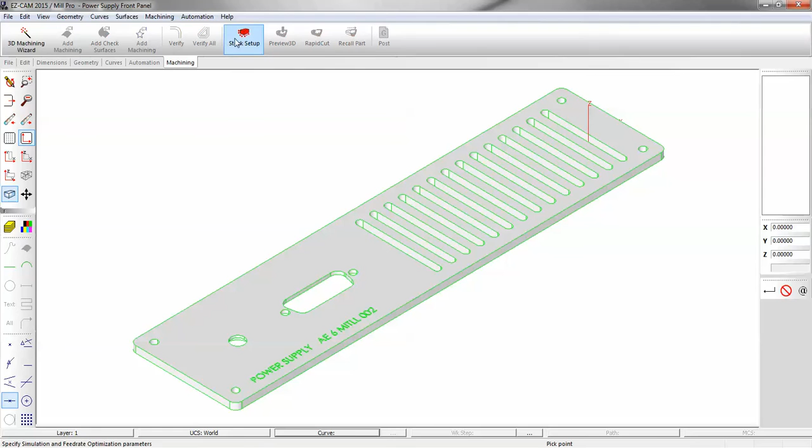Okay, we're going to machine these slots. I'll do the pocket from the back side along with this counter bore. And we'll do the engraving on the top, cut around the outside edge.

I've added Face Curve to my Curves tab. You can do that by going to View, Customize. You can add any buttons that are found in the menus, and you can also add shortcut keys. For example, I want to measure the slot, so I hit my shortcut key and measure the radius.

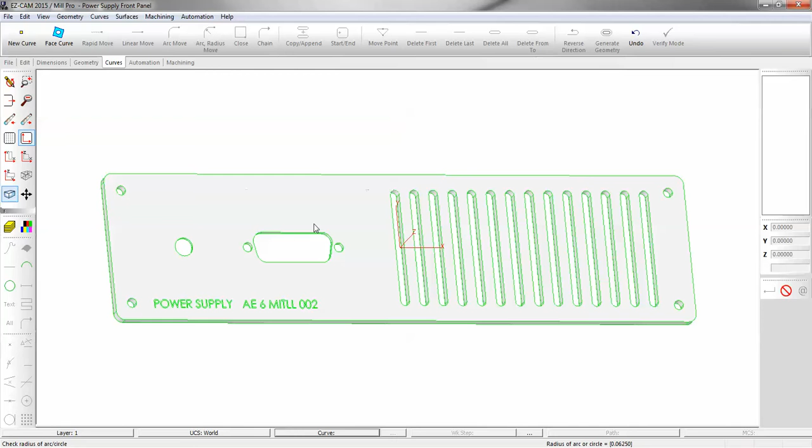I can use a 1/8 tool to go straight through. Now I could use a pocket with a smaller tool, and I'm going to show you contouring and pocketing. So we'll go with a face curve.

I'm going to pick the bottom face. Gave me all the curves I need for the slots. Gave me the curve for the outside profile. We'll use hole recognition to machine these holes.

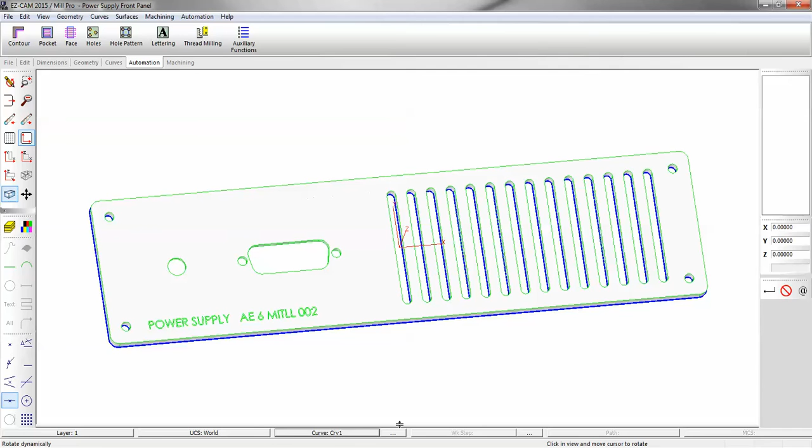So I'll start off with, this is my active curve, and then we'll add the other curves in there as well. Because that was my active curve, it'll know to include that. If you're using cutter comp, we're using a 1/8 tool. Left for climb mill, right for conventional.

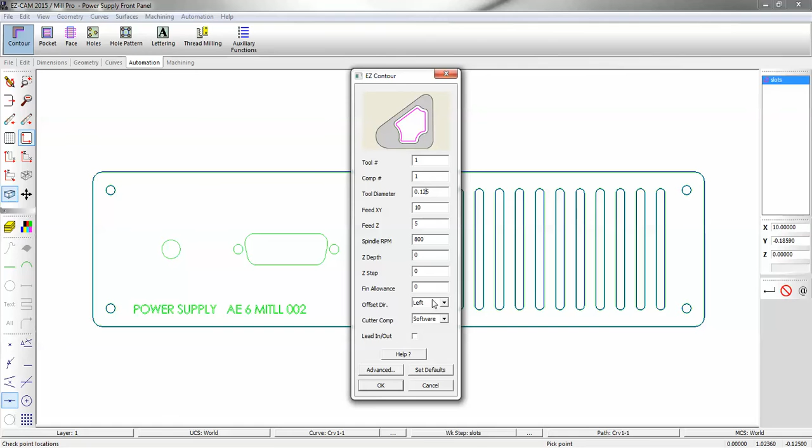I'm going to go to advanced. Now the curve is at the bottom of the part, so I could leave the depth at 0, or you can hit the auto button. And we want to go a little deeper.

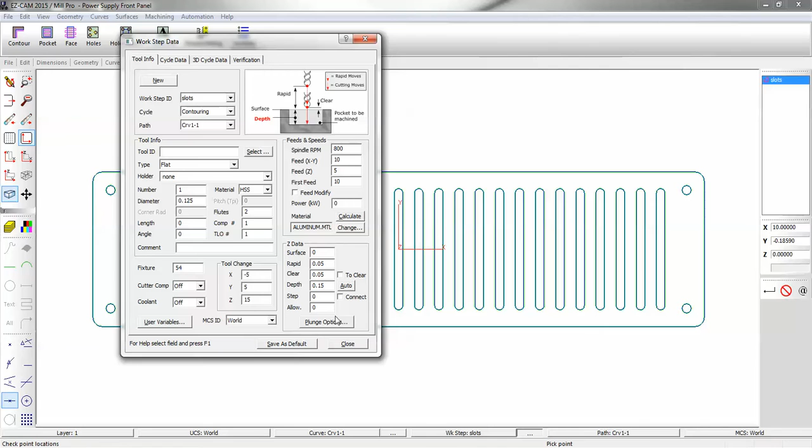Then for plunging, rather than plunge straight down like a drill, you could pre-drill and you could have the tool plunge in a pre-drilled location. I'm just going to use a ramp, and I'll use a straight ramp at 1/4 of an inch length distance.

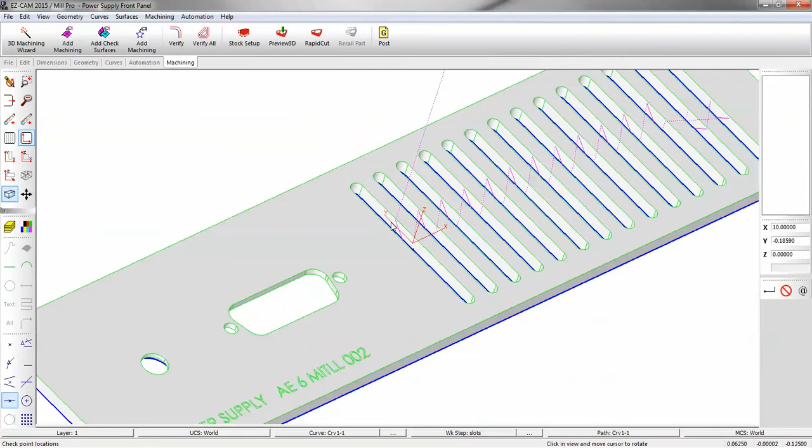And I'm going to add my machining curves. Verify. As you can see, you're getting your ramp to depth. Now if I don't want to go full depth, I can just add a step. Then you get multiple passes until you get to the depth.

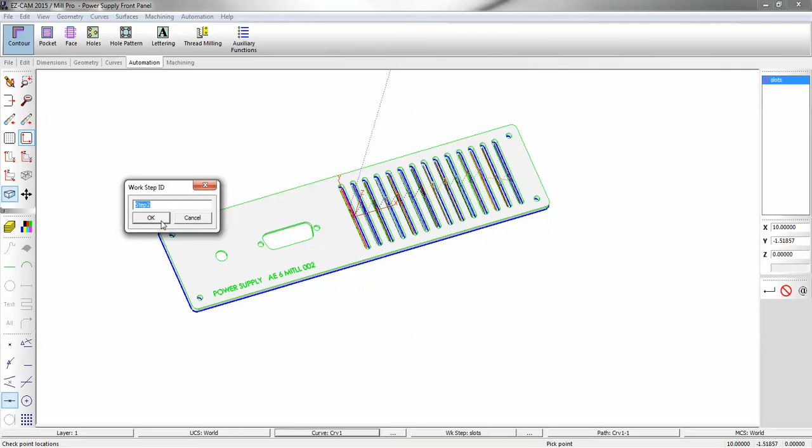Next I'll machine the outside profile. We'll use a 1/2 inch tool. I'm not worried about the feeds and speeds. You can calculate those. Let's go to advanced. Change that to a carbide tool and hit calculate. And of course we can restrict it to your maximum RPM and scale the feed rates back accordingly.

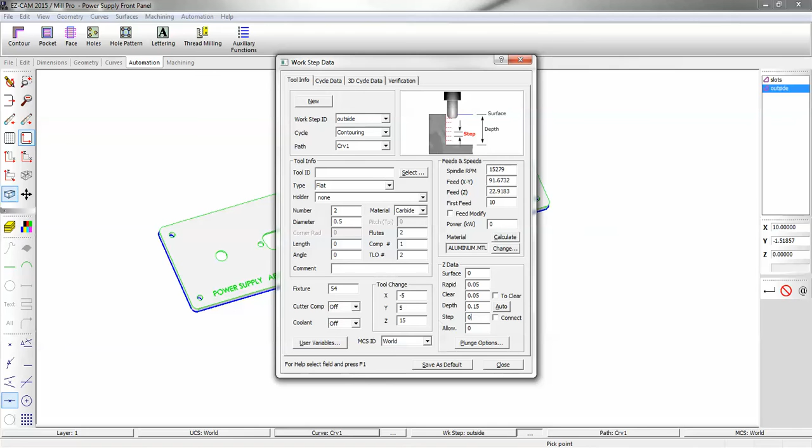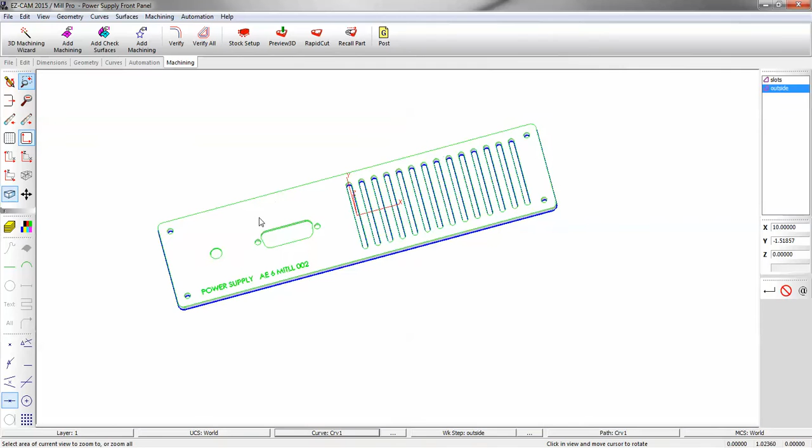That's what we have so far. You can slow the simulation down with the numbers on your keypad. 0 will pause it, and you hit enter and it will step through the process. Now I'll go with hole recognition.

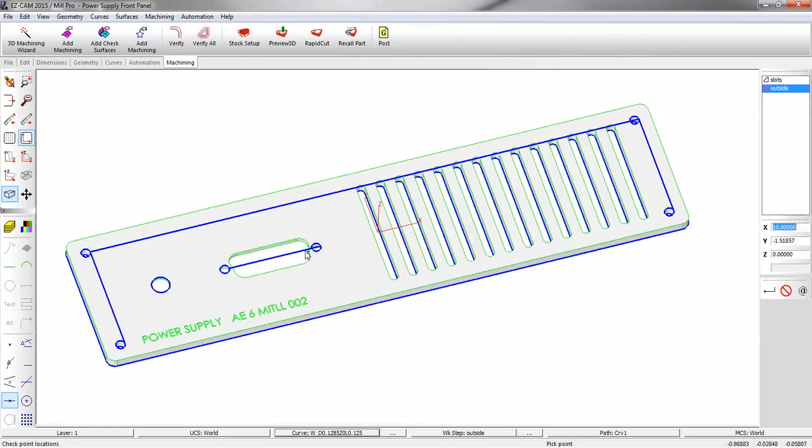Now these straight lines are just grouping all of the curves, all the holes that are of the same diameter and the same depth, the same height, and so on and so forth. So let's measure these holes over here. And it's just over 1/8 of an inch. So let's say I want to drill and ream.

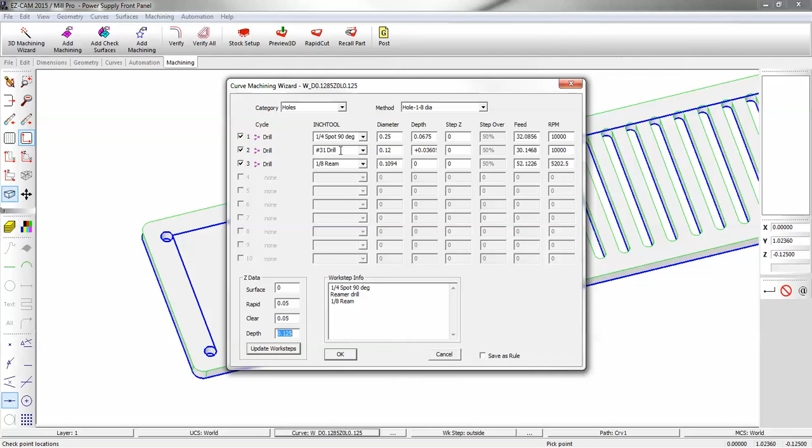So I'm just going to double click on that curve, go to holes, and I'm going to select a 1/8 diameter hole. It will give you the spot drill, the drill, and the reamer. Hit update work steps, verify. When I hit verify all, it calculates and gives me an estimated machine time and rapid cut. So there's our reamed holes.

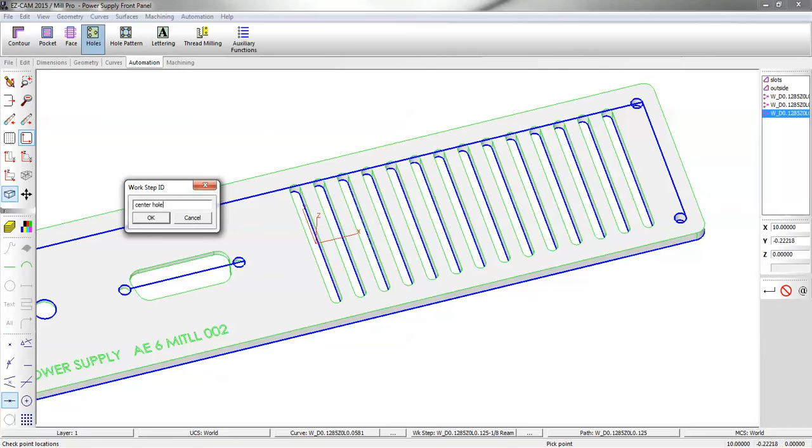Then I'll show you another technique. Instead of double clicking on it, I can go to holes, call that center hole. Go right to advanced. It's a .128, so it's the same as the previous tool.

So I'm going to go into my library, and you can pick your different tools. I'm going to pick a drill, and we're going to go with a 1/8. The depth is .125, but let's say I put an angle on my drill, 118, and I want the body of the drill at .125. So I hit the auto button, and you can see here it calculates the additional depth for you.

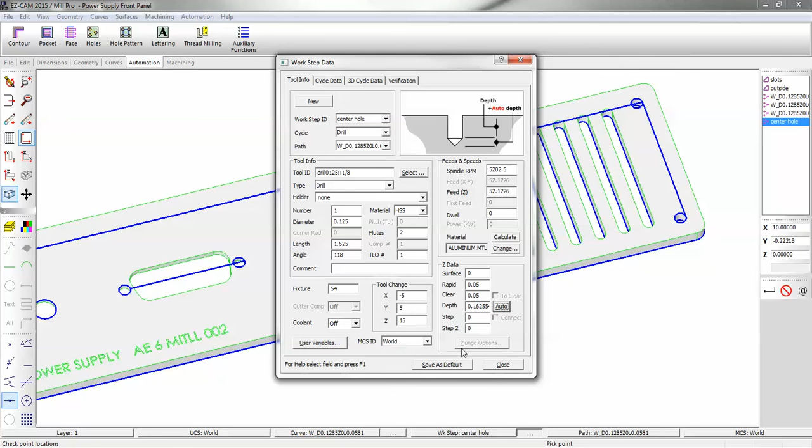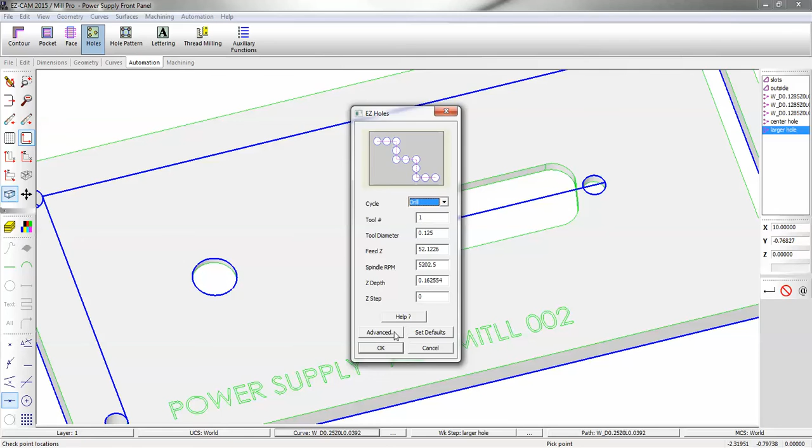Make this my active curve. Quarter of an inch diameter, so we'll go in our library, 1/4 inch, 118, so far so good.

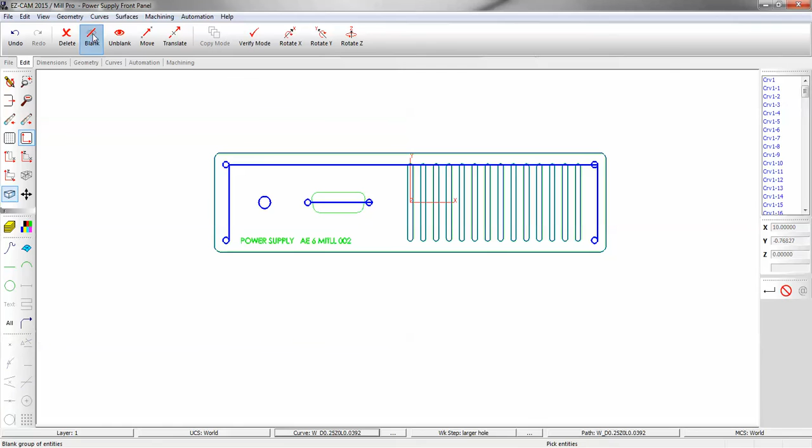Now I'll engrave, and I'm going to basically hide everything. I don't want it to chain the outside geometry, so what I'm going to do is just make the geometry visible of what I want to chain. Actually, I'm sorry, we're going to get the surfaces to help us out here. So I'm going to go with blank, verify mode, so it gives me the opportunity of changing my selection. I'm going to say all. I'm going to pick only surfaces, and I'm going to exclude those surfaces right in through there.

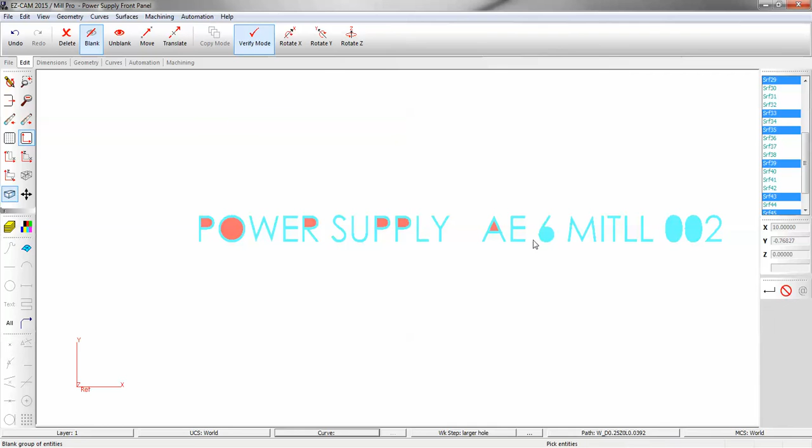Enter. I'm going to change the color. Those are white, so similar to the background. I'm going to change color, go to default, EZ-CAM's custom settings. Now I can see our surfaces. So I'm going to go blank. I'm going to pick the center surfaces because I'm going to get the outline on the outside and it'll give me the outline on the inside, so I don't need to have those surfaces in the middle. There we go. So this is what we're going to work with.

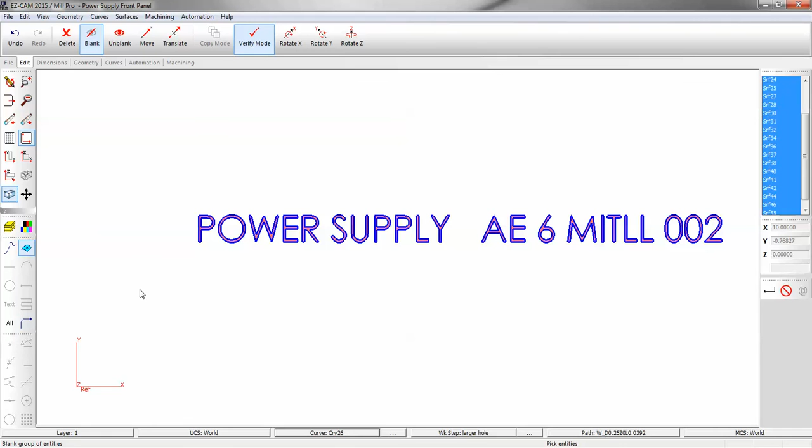And let's see, let's hide the surfaces so I can see inside there. Edit, blank, surfaces, all. We're going to make pockets out of this with an engraving tool. So automation, we'll pick the P. Actually, let's go pocket, letters. Tool 10. The diameter is what the engraving tool would basically represent. So let's go with 0.005. And the depth, let's go with 0.02.

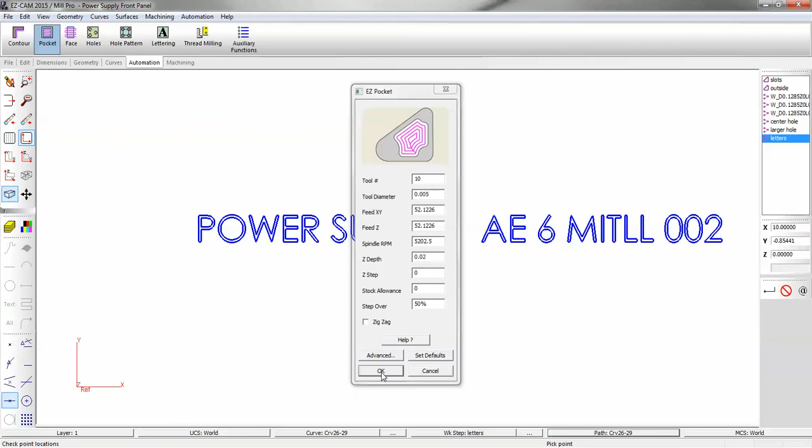Let's turn this curve off. I don't want to use that curve per se. And we'll go with add machining curves, and I can add all of them. Verify. Okay, it excluded the zeros and the P. Oh, these P's also. So what that tells me is there's so many little line segments in here, it gave us a little bit of difficulty. So I'm going to show you how to deal with that.

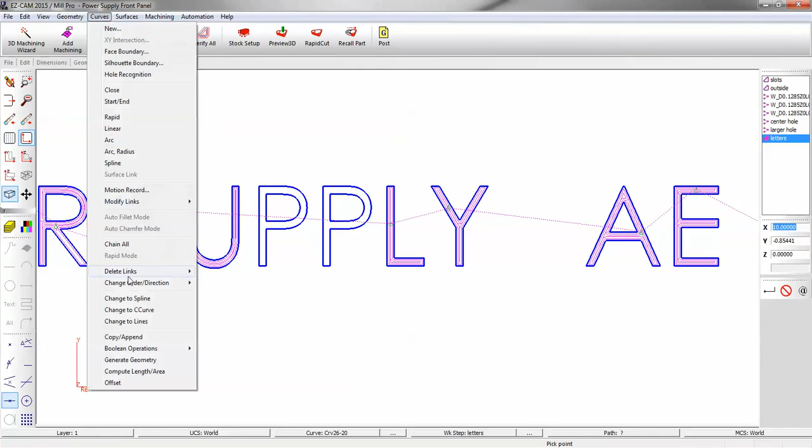So I'm going to click on that curve, and we're going to go to the curve menu, change it to a CCurve, which is tangent. Pick that. Now verify. And now it included the P for us. So we would have to do that for the others. Just make that the active curve. Now I could have made a button for this if this is a common occurrence. So then my button, I could warp it right to my cursor. Save a lot of time. And just 2 more to go.

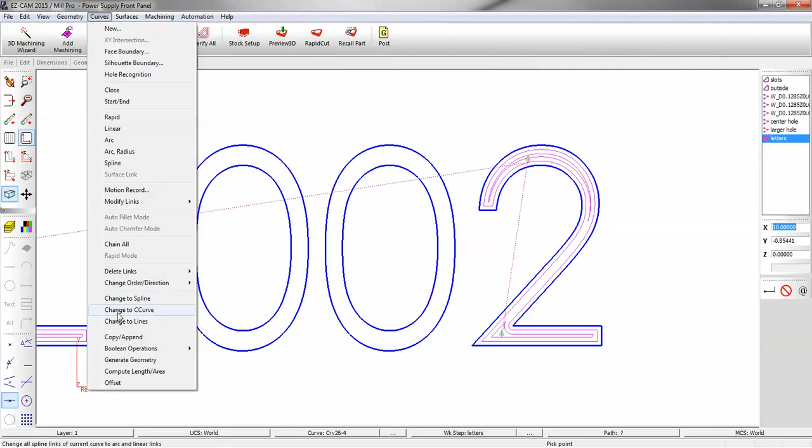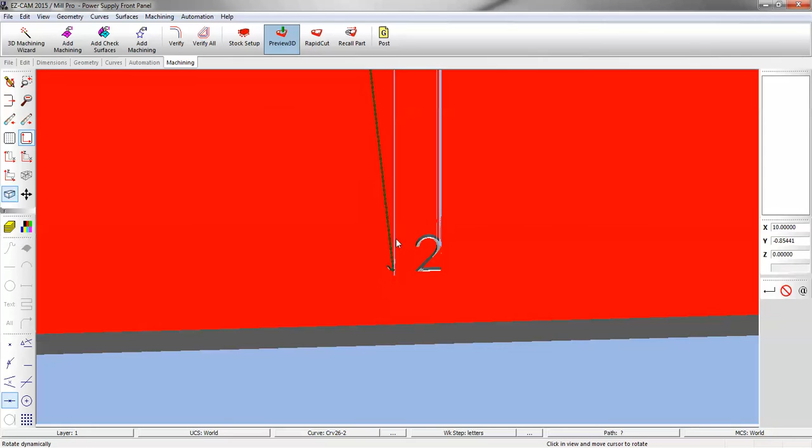I believe you'll find that with your export settings in SolidWorks. I think that would have controlled it a little better, so I wouldn't have to worry so much. There's our engraving. Let's take a look at what we got. Okay, let's show everything here.

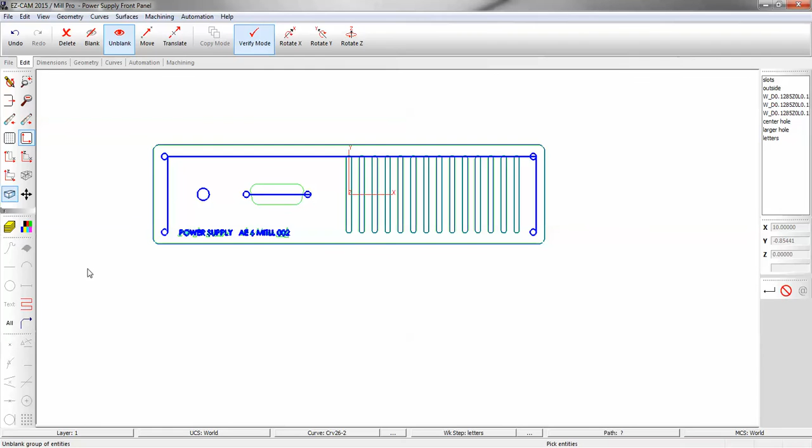Now we're ready for the backside. And of course we want to see the backside machining as we did with the top machining. So I'm going to make a new coordinate system so we can add the other operations right in this document. I don't have to open up another document and make the backside. So I'm just going to go to View, New Coordinate System, and we'll call this bottom.

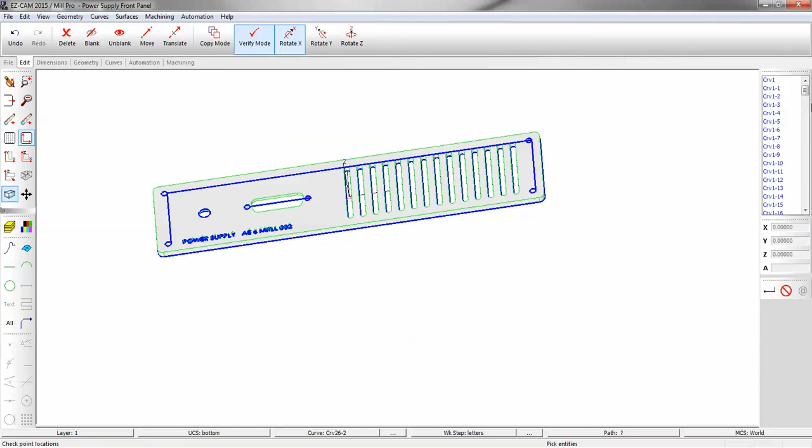And we'll place the bottom coordinate system directly over the top. We're going to move it down by 1/8 of an inch. So we go Translate, Z negative 0.125. Pick our coordinate system. And then we're going to rotate it so we can have the bottom part of the face, 180 degrees. Isometric view. Okay, now we're positioned.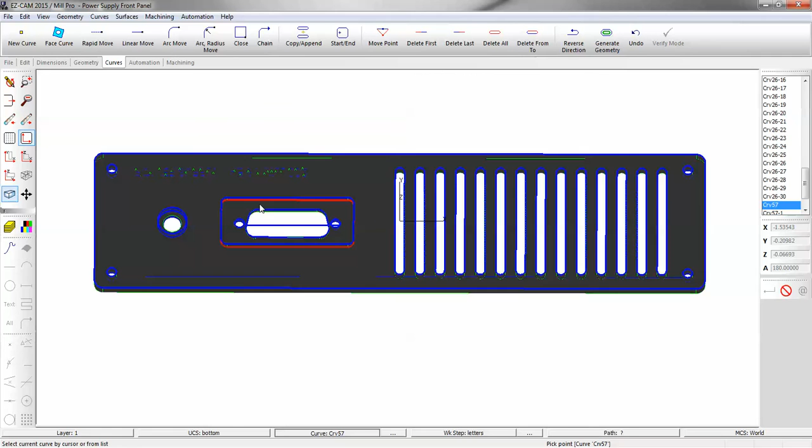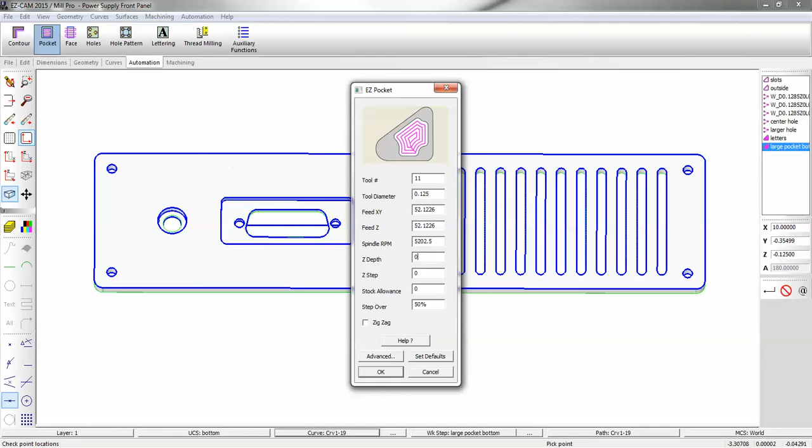So the only thing left are these 2 pockets. I'll make the larger pocket active. Depth 0, let it figure it out for me. Okay, now it's coming from the bottom, so I forgot one step, so I go back in and I change my coordinate system to the bottom.

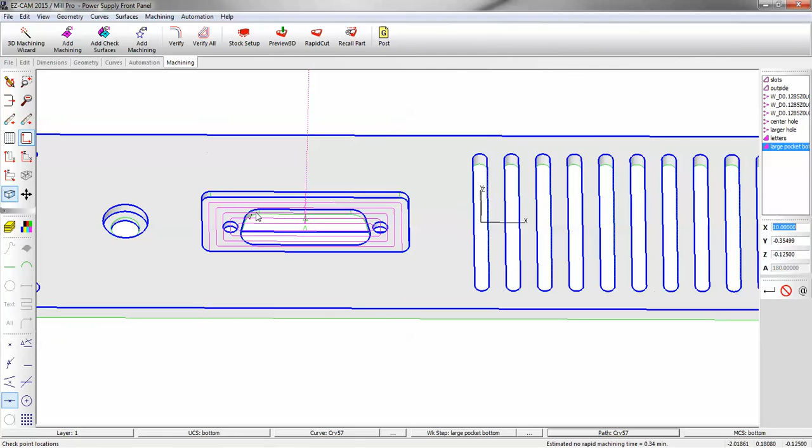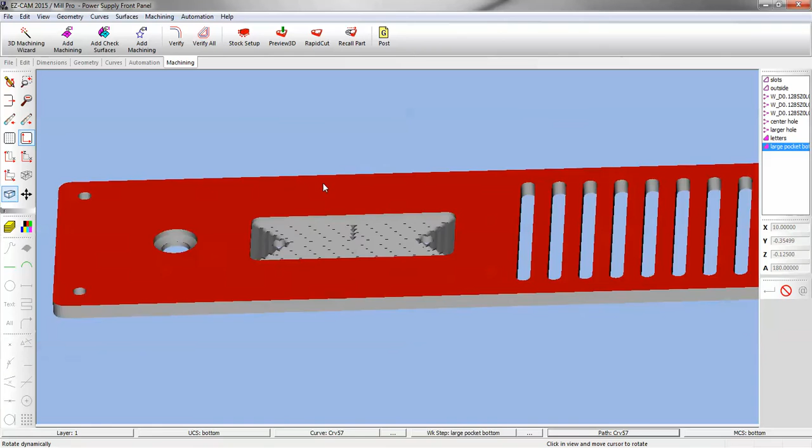Let's include this one over through here. Add machining curves. We wanted to add a flat end mill 125. There we go.

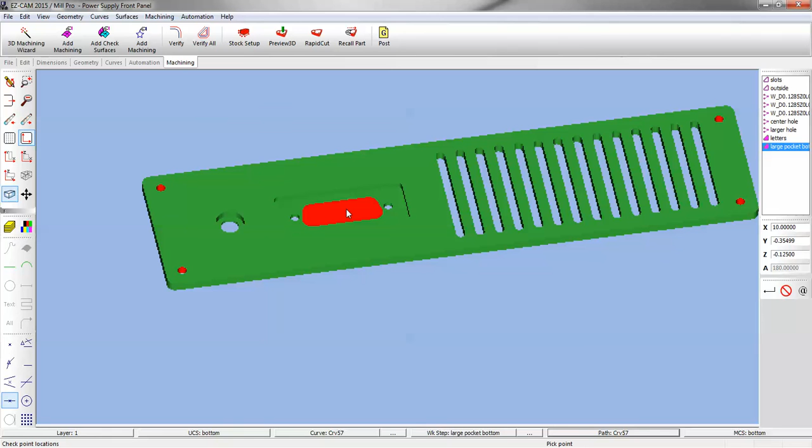Now before I take the next step, we're going to show you part compare. So I'm going to go with the stock setup, create uncut solids. It's going to show me what areas have been cut properly and what needs to be cut. Green is cut. These holes just need to be a little larger, but it shows me everything about this model has been completed except for this section through here.

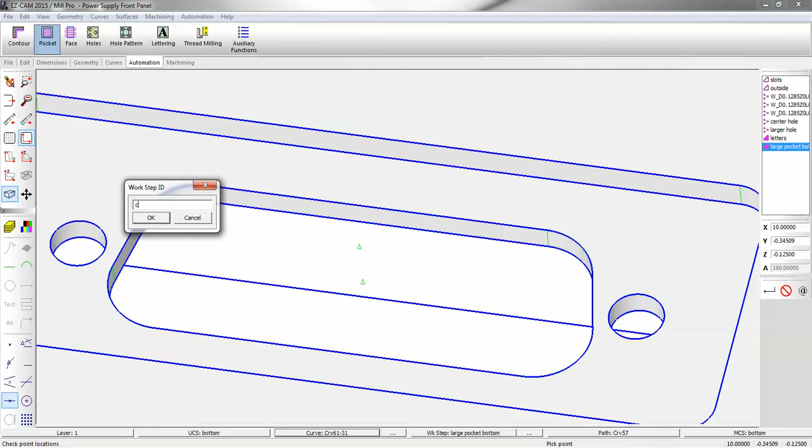So I'm going to just steal a curve from the face. Make that my active curve. And this would be complete.